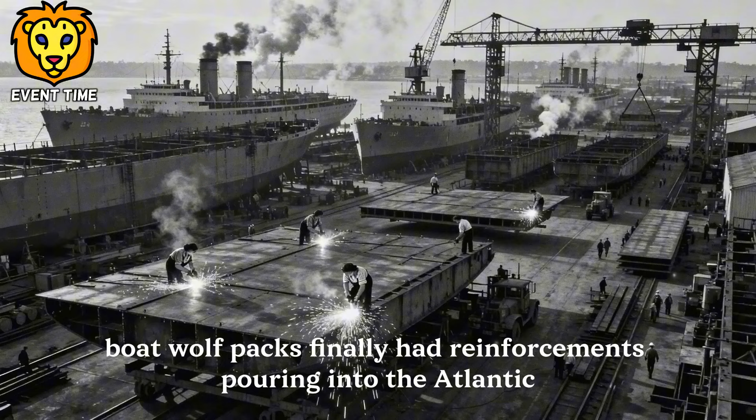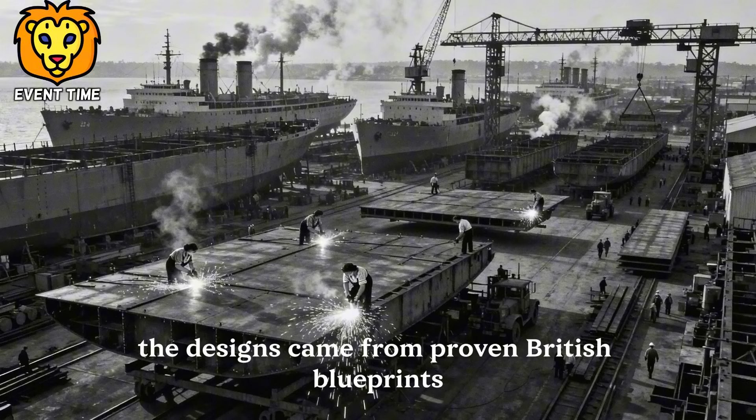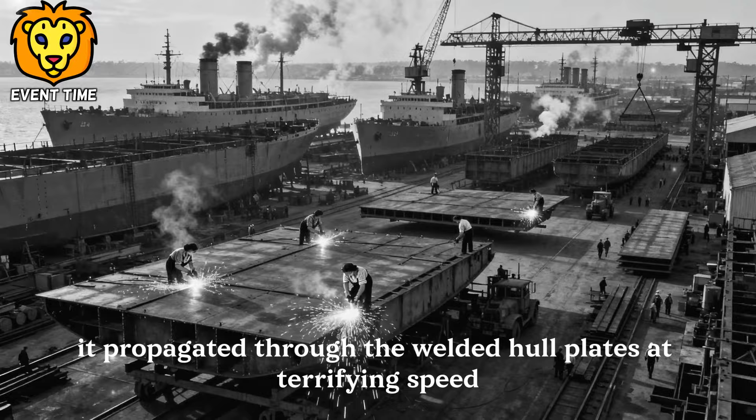The Allied shipping tonnage, devastated by U-boat wolf packs, finally had reinforcements pouring into the Atlantic. Then the ships started breaking, not from torpedo damage or rough seas, but spontaneously, catastrophically, in conditions that should have been routine. Naval architects were baffled. The welds looked solid. The steel met specifications. The designs came from proven British blueprints. Yet Liberty ships were fracturing like porcelain teacups. The cracks typically started at sharp corners, hatch openings, gun mounts, the squared-off design of the hull. Once a crack initiated, it propagated through the welded hull plates at terrifying speed, sometimes racing the entire length of a ship in seconds.

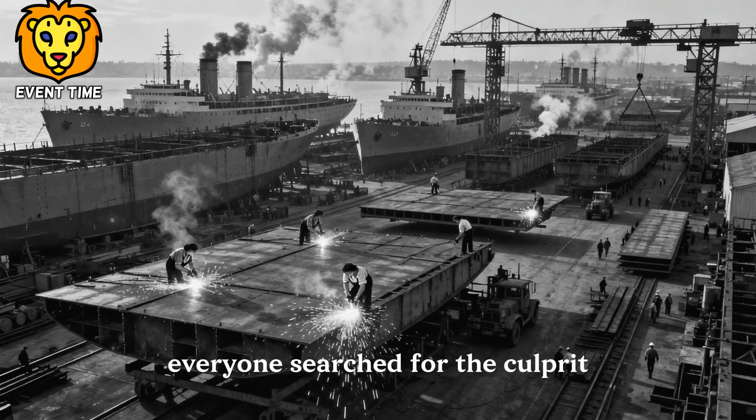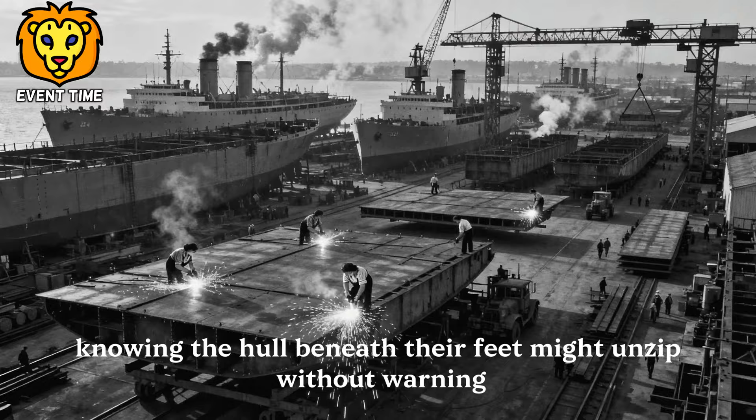The Maritime Commission convened emergency investigations. Metallurgists examined failed sections under microscopes. Engineers reviewed stress calculations. Naval inspectors crawled through hulls with measuring instruments. Everyone searched for the culprit: bad steel, faulty welds, design flaws, inadequate quality control. Ships continued splitting while committees debated. Sailors grew terrified of their own vessels, knowing the hull beneath their feet might unzip without warning in cold Atlantic waters. The miracle of mass production had become a maritime nightmare, and nobody could explain why ships built in record time were failing in record numbers.

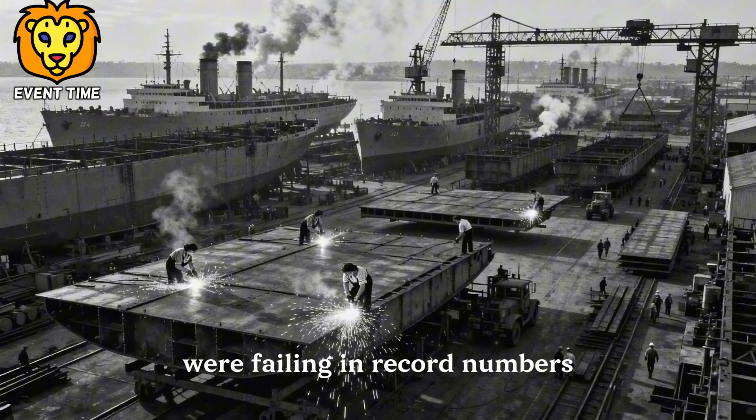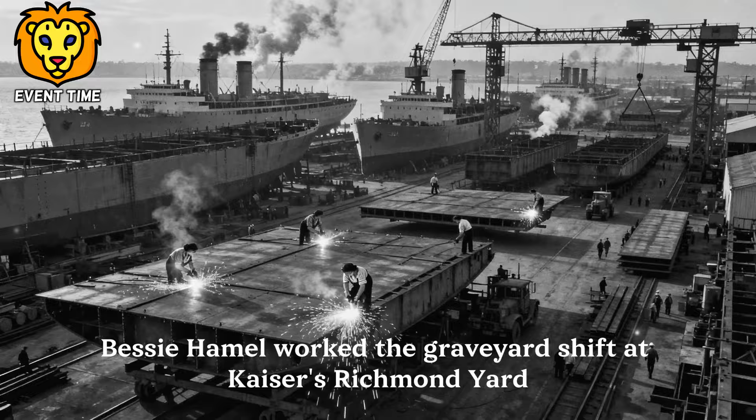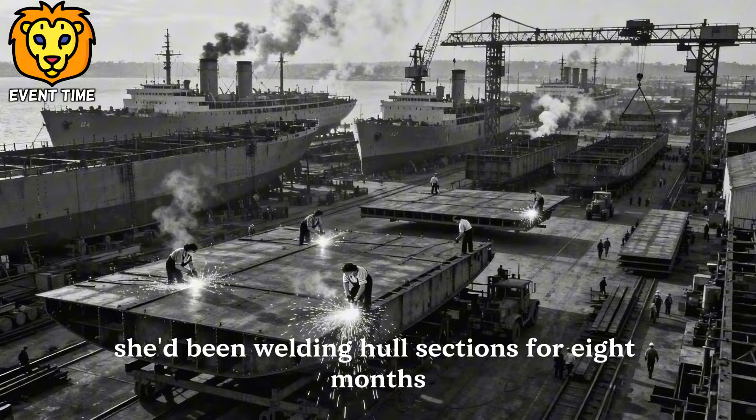The answer came from the least likely source: a welder on the assembly line who wasn't supposed to question engineering decisions. Bessie Hamel worked the graveyard shift at Kaiser's Richmond Yard No. 3, one of thousands of women who'd flooded into shipyard work after the men shipped overseas. She'd been welding hull sections for 8 months, long enough to notice something the engineers apparently hadn't.

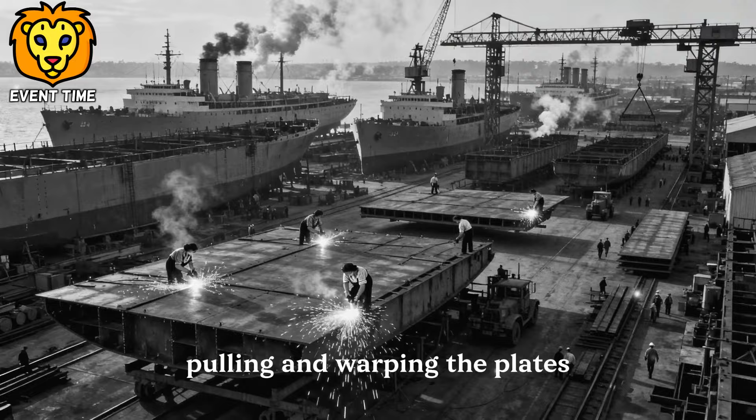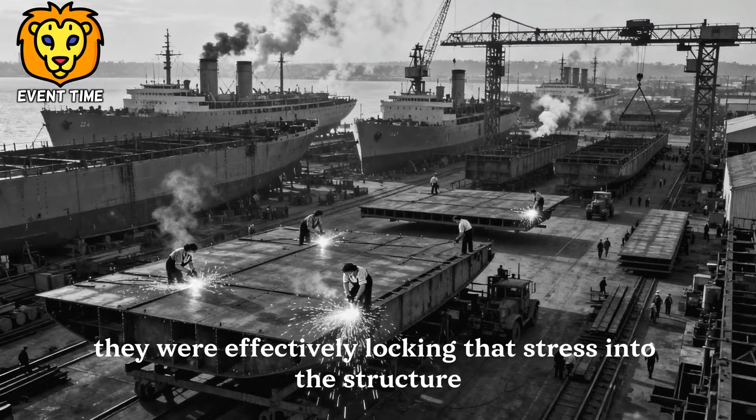Every night, she watched her team weld massive steel plates in a sequence that made no mechanical sense whatsoever. Hamel saw welders starting at the edges of plates and working inward, or beginning at one end of a long seam and running straight to the other end. As each weld cooled, the metal contracted, pulling and warping the plates. She could see the stress building, watch the steel distorting under her torch. When welders finished one section and moved to the next, they were effectively locking that stress into the structure permanently. It was like tightening the center bolts on a car wheel before securing the outer ones, a recipe for imbalance and failure.

Her foreman dismissed her concerns. She was a welder, not an engineer. The sequence came from the engineering department, from men with college degrees and naval architecture training. Hamel persisted anyway.

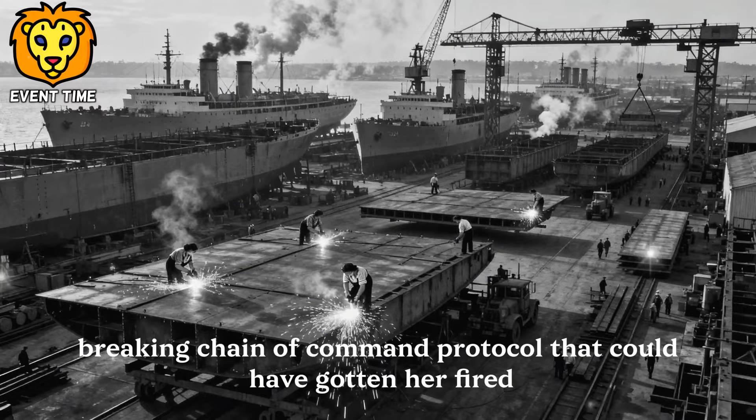In November 1943, she requested a meeting with yard supervisors, breaking chain of command protocol that could have gotten her fired. She brought samples, test plates she'd welded on her own time using different sequences. Some showed significant warping and visible stress patterns.

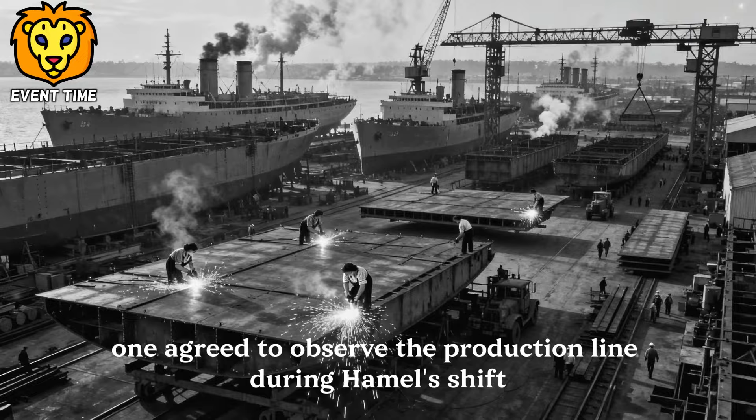Others welded from the center outward in a carefully planned sequence lay flat and true with minimal distortion. The supervisors were skeptical but intrigued. One agreed to observe the production line during Hamel's shift. What he saw confirmed her observations.

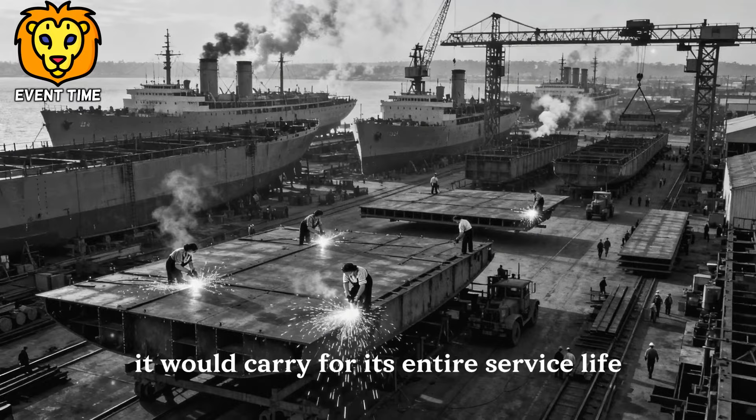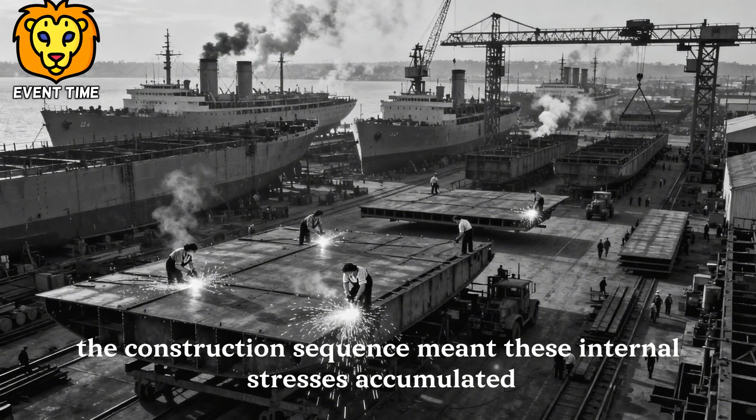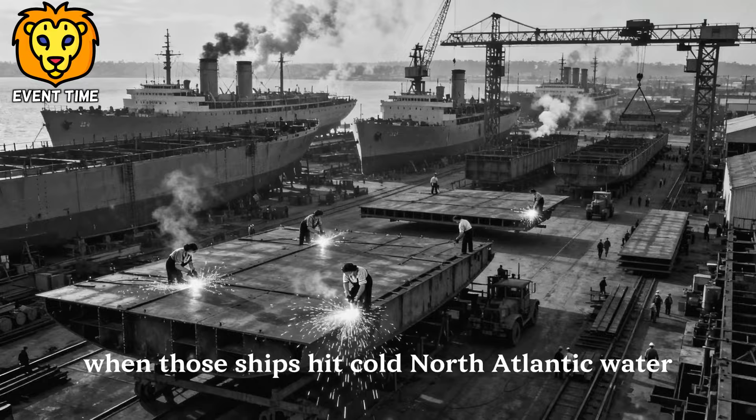Welders were essentially torturing the steel, forcing it to accept stresses it would carry for its entire service life. Every cooling weld created residual tension in the metal. The construction sequence meant these internal stresses accumulated and concentrated at specific points, particularly at the corners of hatch openings and other stress concentration points. When those ships hit cold North Atlantic water, the steel became brittle. The locked-in residual stress, combined with brittleness, created perfect conditions for catastrophic fracture.

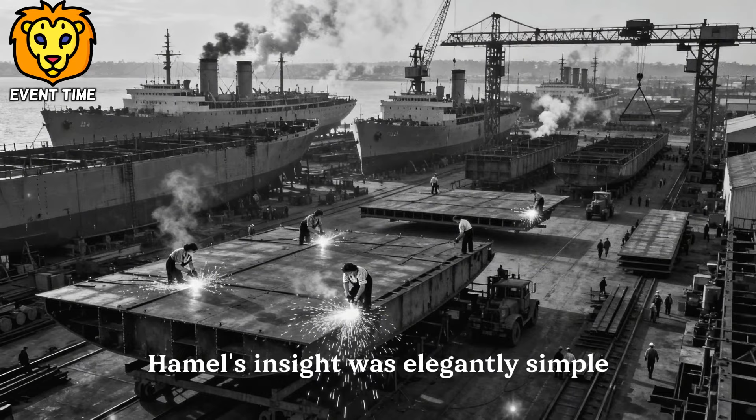Hamel's insight was elegantly simple. Weld from the center of sections outward, allowing stress to dissipate toward the edges rather than concentrate in the middle. Alternate welding locations to prevent heat buildup in any single area. Never complete welds in long, continuous runs. Instead, use a balanced sequence that distributed cooling stresses evenly.

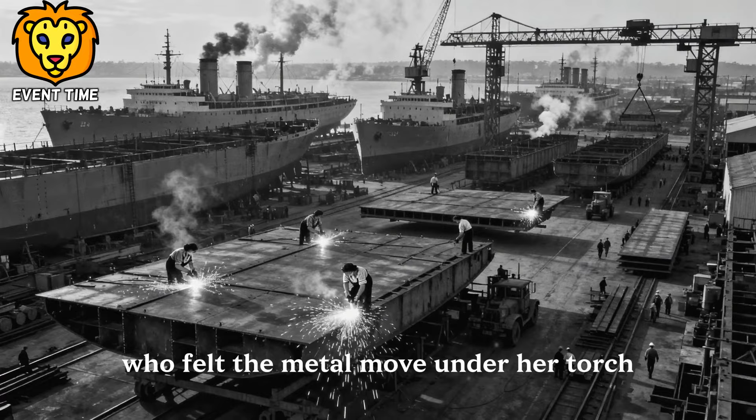These weren't revolutionary metallurgical theories. They were practical observations from someone who actually worked with the material every day, who felt the metal move under her torch and recognized the consequences.

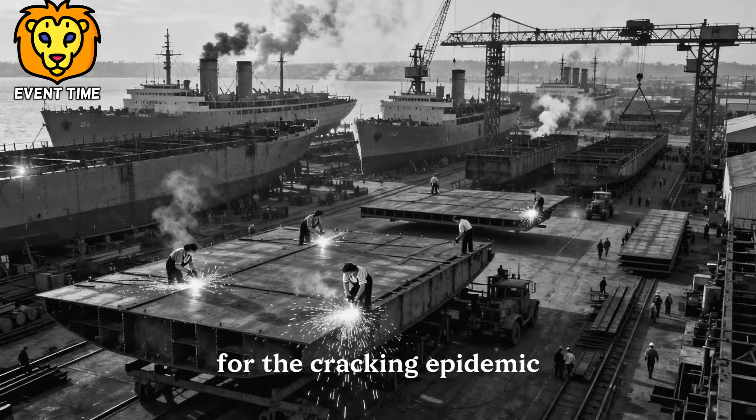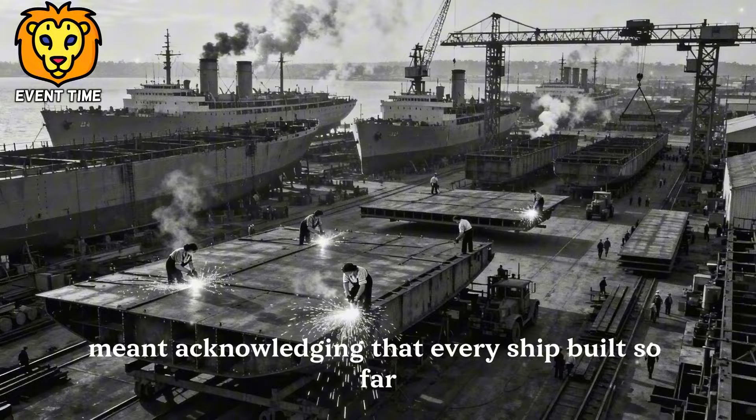By December 1943, her observations reached Henry Kaiser himself. He faced a brutal choice. The Liberty ship program was already under congressional scrutiny for the cracking epidemic. Admitting that the construction sequence, not the steel quality or weld integrity, was the fundamental problem meant acknowledging that every ship built so far had systematic flaws baked into their hulls.

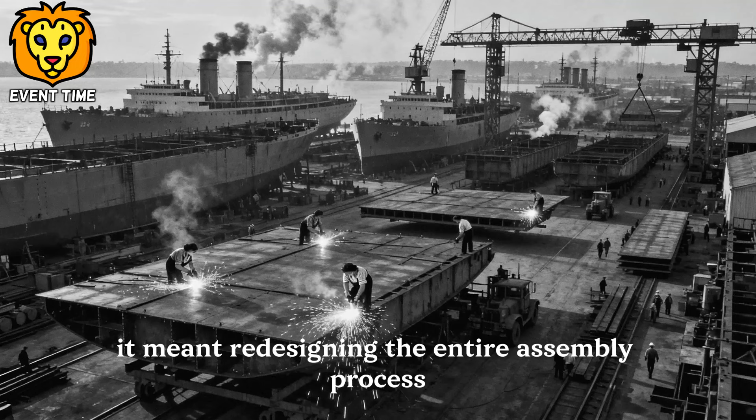It meant temporarily slowing production to retrain thousands of welders. It meant redesigning the entire assembly process. But it also meant potentially solving the fracture crisis that threatened to undermine America's entire maritime logistics chain. Kaiser, to his credit, didn't hesitate. He authorized immediate testing of Hamel's theories, pulling an entire hull section from the production line for experimental reconstruction.

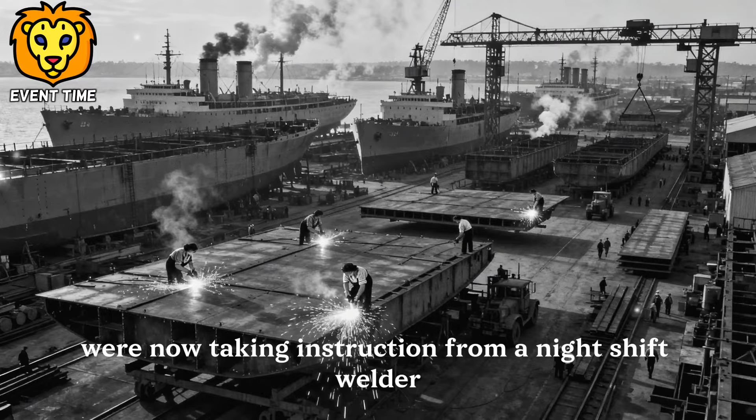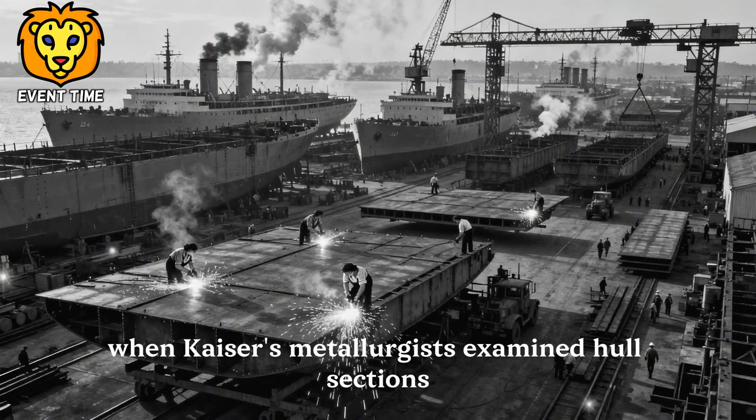The metallurgists and engineers who'd spent months analyzing failed ships were now taking instruction from a night shift welder who'd never seen the inside of a college classroom. The test results were damning and revealing in equal measure. When Kaiser's metallurgists examined hull sections constructed using conventional sequences versus Hamel's methods, the difference was measurable and dramatic.

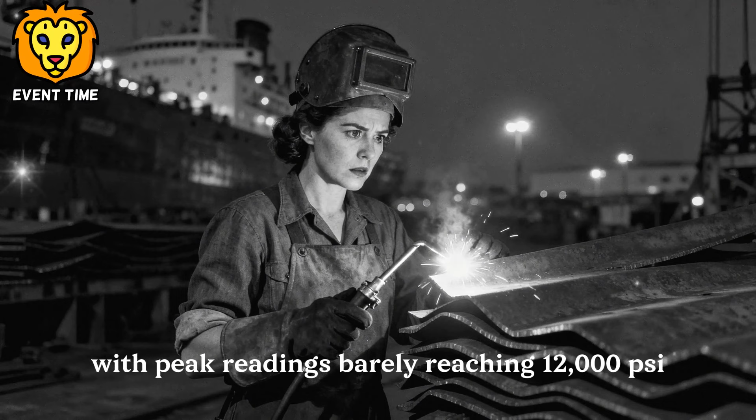Residual stress gauges showed traditional welds carried internal tensions exceeding 30,000 pounds per square inch, concentrated at key structural points. Hammel's sequence sections distributed those stresses across broader areas, with peak readings barely reaching 12,000 psi. The steel itself was identical. The welds were chemically indistinguishable. Only the order of operations had changed. Yet the structural integrity improved by factors the engineers initially refused to believe.

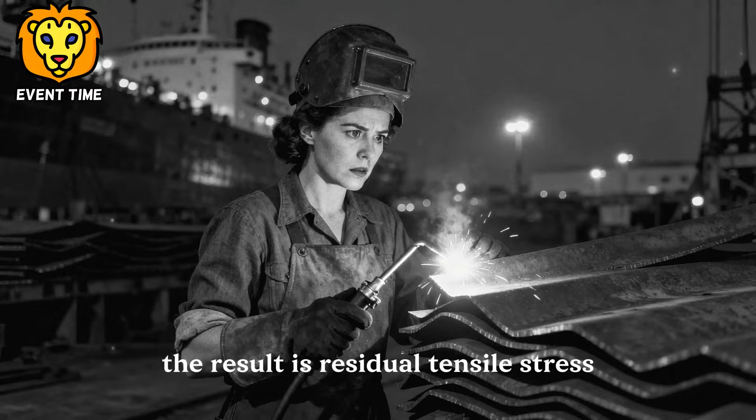The physics behind the failures finally became clear. Steel is not a static material. It's a crystalline structure that responds dynamically to temperature changes. When welders run a torch along a seam, they're creating a localized temperature exceeding 2,500 degrees Fahrenheit. The metal expands dramatically in that heat zone. As the weld cools, it contracts, but the surrounding cold steel constrains that contraction. The result is residual tensile stress locked permanently into the structure unless the welding sequence allows the stress to redistribute.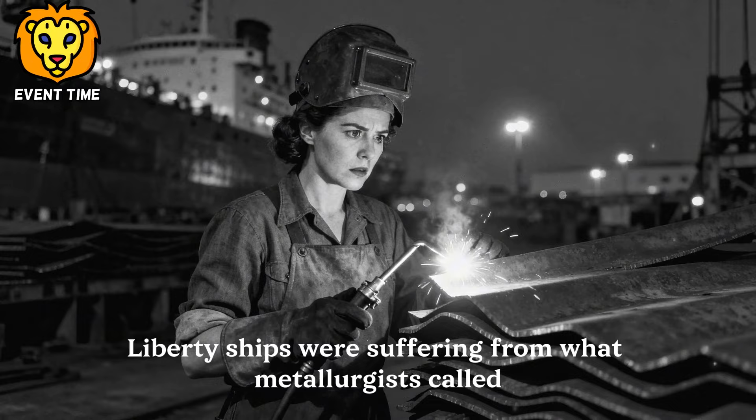Liberty ships were suffering from what metallurgists called brittle fracture propagation. The steel used in their hulls, a carbon steel designated as shipbuilding grade, performed adequately in warm water, but underwent a critical transformation in the North Atlantic's near freezing temperatures. Below roughly 40 degrees Fahrenheit, the steel's ductility collapsed. Normally, metal absorbs stress by deforming slightly, bending rather than breaking. Cold steel loses that flexibility. It becomes brittle, more like glass than the tough material welders worked with in California's mild shipyards.

When brittle steel meets concentrated residual stress at a sharp corner, say the square edge of a cargo hatch, physics takes over with brutal efficiency. A microscopic crack initiates. In ductile steel, that crack would stop, absorbed by the material's ability to yield. In brittle steel under tension, the crack becomes a sprinting fracture. The energy stored in those residual stresses provides fuel for the crack to propagate.

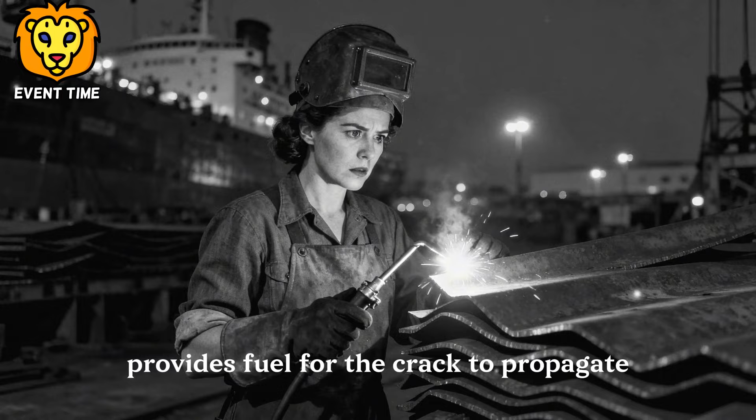Sharp corners act as stress concentrators, multiplying the local stress by factors of 3 or more. The crack accelerates, sometimes exceeding the speed of sound in steel, racing through the hull before bulkheads or frames can arrest it.

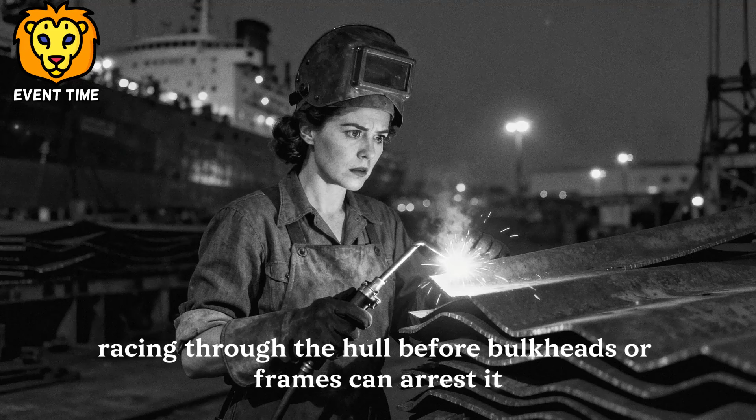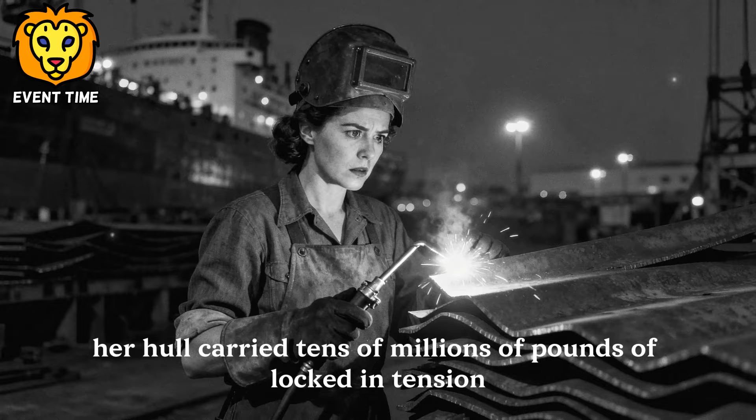The SS Schenectady's fracture made perfect sense in hindsight. She'd been built in early winter, welded in sequences that maximized residual stress. Her hull carried tens of millions of pounds of locked-in tension. When the Portland morning dropped to 28 degrees, the steel became brittle.

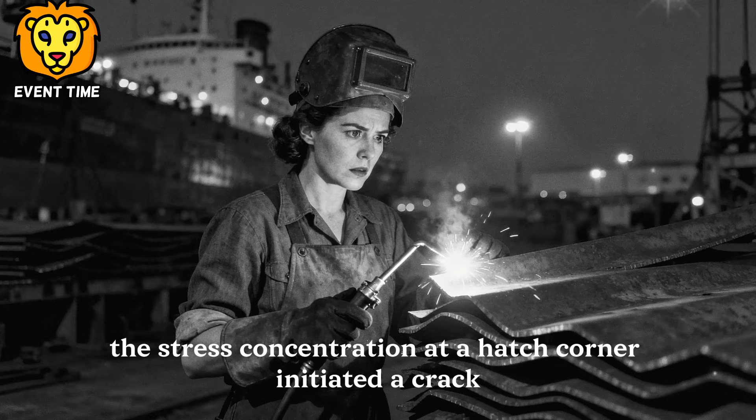The stress concentration at a hatch corner initiated a crack. That crack found a straight path through continuously welded deck plates. No riveted seams to slow it, no stress relief breaks to stop it. The fracture consumed the ship in seconds, releasing decades' worth of stored energy in one catastrophic failure.

Traditional riveted ships didn't suffer this problem, and the reason illuminated why welding seemed cursed. Riveted construction is inherently discontinuous. Each riveted plate is a separate element. Cracks that start in one plate hit a riveted seam and stop. The overlapping plates and mechanical fasteners create natural crack arresters.

Welded ships are continuous structures. A crack in one plate can run unimpeded through hundreds of feet of welded seams. The efficiency that made welded ships faster to build also made them vulnerable to failures riveted ships couldn't experience.

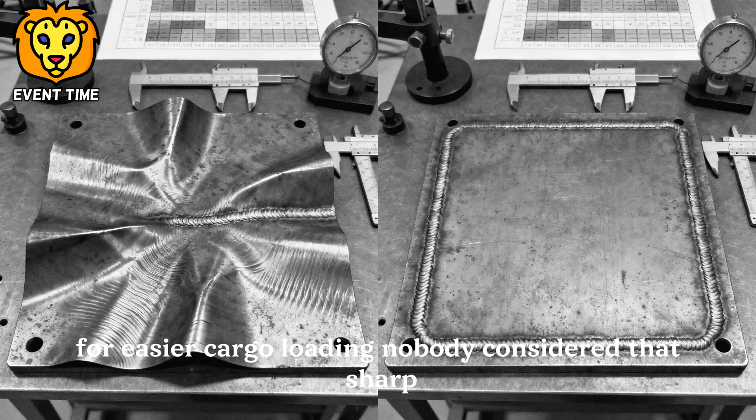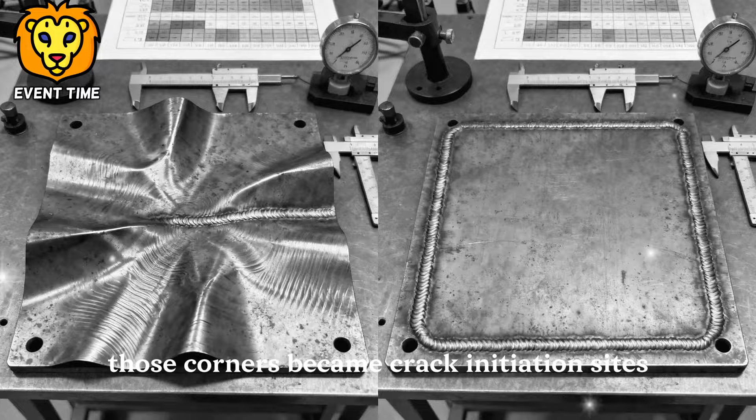The Liberty ship's squared-off design compounded the problem. British maritime architects had specified those hard corners for easier cargo loading. Nobody considered that sharp internal corners create stress concentrations that multiply applied loads by huge factors. Every wave that flexed the hull sent stress spikes through those corners. Combined with residual welding stress and brittle steel, those corners became crack initiation sites, waiting for the right conditions to fail catastrophically.

Henry Kaiser understood what the test results meant for his empire and the war effort. In January 1944, he made a decision that would either vindicate his industrial revolution or expose him as a reckless privateer who'd sent thousands of sailors to sea in defective ships.

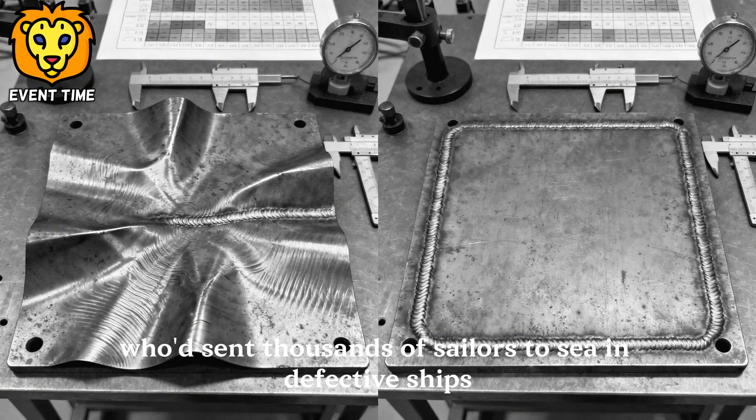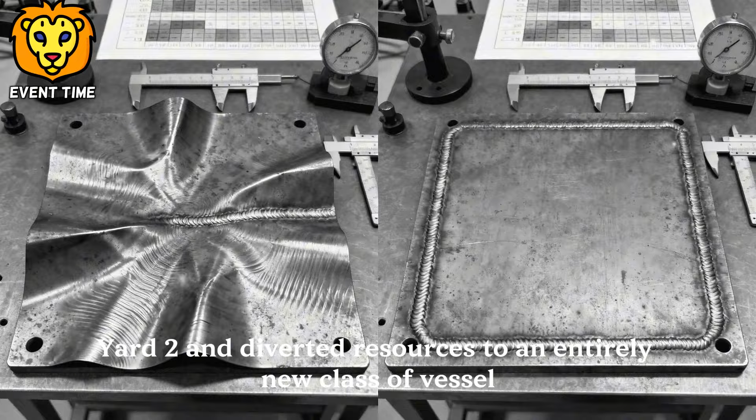He ordered a complete halt to Liberty ship production at Richmond Yard 2 and diverted resources to an entirely new class of vessel, the Victory ship. This wasn't a minor modification. It was a fundamental redesign built around Bessie Hamill's welding observations and the hard-earned lessons written in fractured hulls across two oceans. The gamble was staggering.

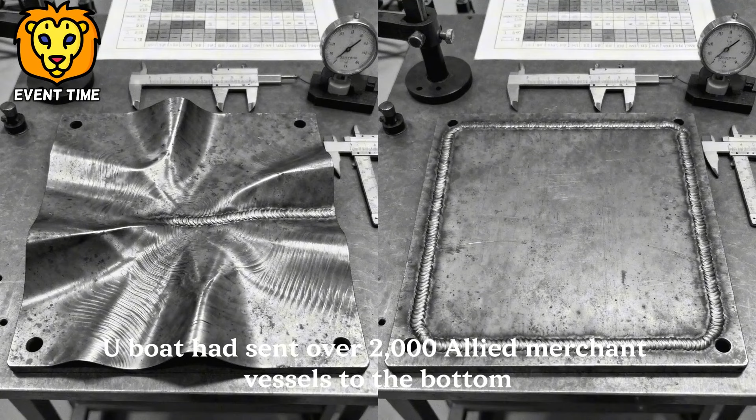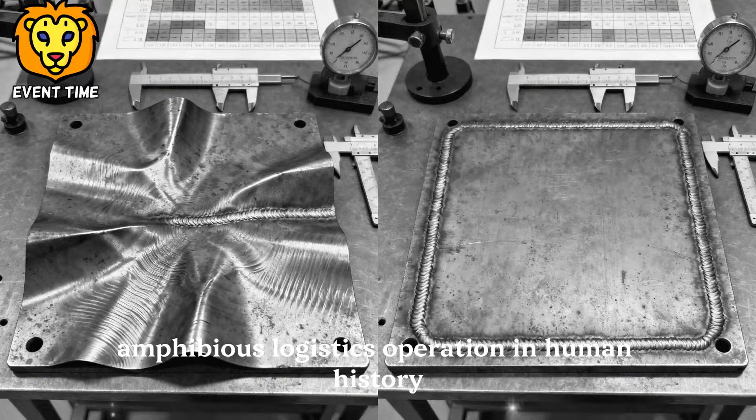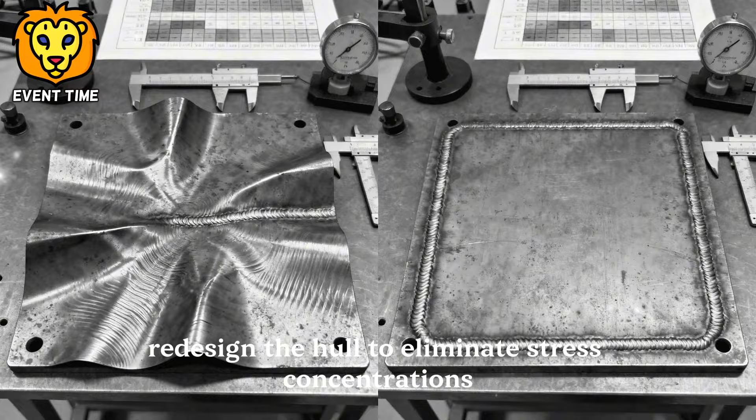Liberty ships were still desperately needed. U-boats had sent over 2,000 Allied merchant vessels to the bottom since 1939. The invasion of Europe, still months away in early 1944, would require the largest amphibious logistics operation in human history. Every ship mattered. Yet Kaiser was betting that he could implement Hamill's sequenced welding system, redesign the hull to eliminate stress concentrations, improve the steel specifications, and somehow maintain production speeds that already seemed miraculous.

His competitors thought he'd lost his mind. Congressional investigators sharpened their knives, ready to crucify him if production collapsed.

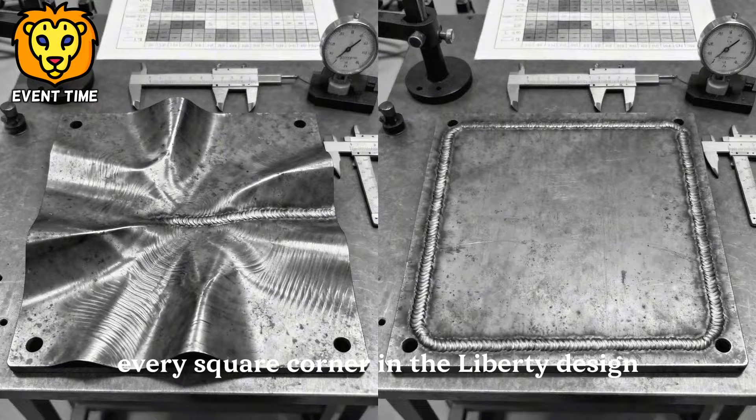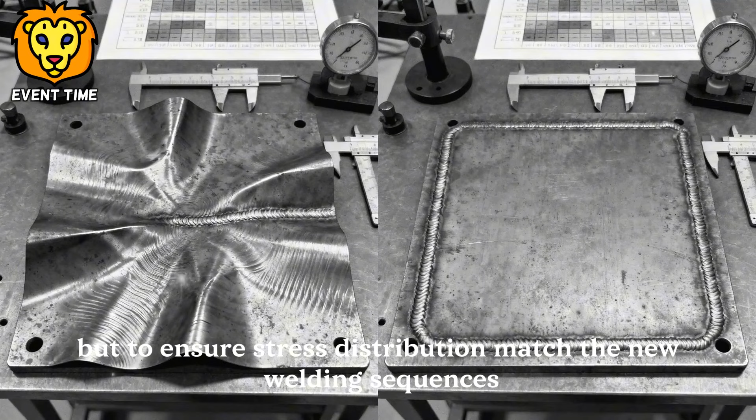Kaiser's engineers worked backward from the failure points. Every square corner in the Liberty design got replaced with rounded transitions. The hatch openings that had birthed so many cracks were redesigned with generous radii, eliminating the stress multipliers that turn normal loads into fracture initiators. The deck and hull plate thicknesses were recalculated, not to add strength, but to ensure stress distribution matched the new welding sequences. Structural frames were repositioned to align with natural stress relief points rather than fighting against the welding pattern.

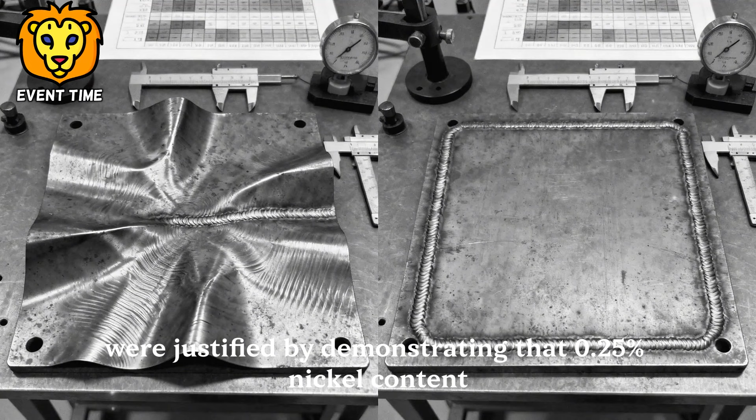The steel itself changed. Kaiser's metallurgists specified a new alloy designation with improved low-temperature toughness. The carbon content was reduced slightly and manganese content increased. Small additions of nickel, expensive and rationed for armor plate, were justified by demonstrating that 0.25% nickel content dramatically improved the steel's resistance to brittle fracture.

The Maritime Commission balked at the cost until Kaiser presented calculations showing that one prevented ship loss would pay for the upgraded steel in 50 vessels. In March 1944, the new steel specification was approved.

Then came the massive undertaking of retraining the workforce. Richmond's shipyards employed over 90,000 workers by early 1944. Thousands were welders who'd learned their trade in weeks-long crash courses, mastering just enough technique to lay straight beads at production speed. Now they needed to understand sequencing, stress relief, and thermal management.

Kaiser established welding schools within the yards, pulling experienced welders like Hamill off the line to teach. Every welder received a numbered sequence card for each hull section. Weld number one here, number two there, never deviating from the prescribed order.

The prefabrication system expanded dramatically. Rather than welding large sections on the ways where sequencing was difficult to control, Kaiser's planners broke Victory ships into smaller modules constructed in dedicated shops. A bow section might contain 50 separate prefabricated assemblies, each welded in controlled conditions using optimal sequences, then stress-relieved in heating ovens before final assembly.

This modular approach meant welders could work from the center of each small section outward, exactly as Hamill had demonstrated, without the constraints of assembling a full hull.

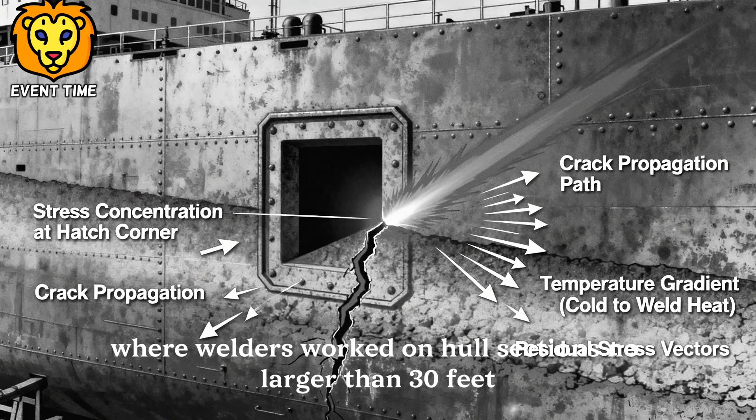The process began in the prefabrication sheds, massive covered structures where welders worked on hull sections no larger than 30 feet in any dimension. Each section had a specific sequence card. A bottom plate assembly might require 47 individual welds, numbered and color-coded.

Welders started at position 1, always the geometric center of the section, and worked outward in a spiral or radial pattern. Supervisors walked the floor with checklists, ensuring nobody skipped ahead.

After every 10 welds, the section went into a stress relief oven, heated to 1,100 degrees, and slowly cooled. This annealing process allowed the steel's crystalline structure to relax, dissipating residual stresses before they accumulated to dangerous levels.

The steel itself arrived pre-cut and pre-formed from rolling mills that had retooled specifically for Victory ship production. Unlike Liberty ships, where yard workers cut and shaped plates on site, Victory ship components arrived ready for immediate assembly.

Curved bow sections came pre-formed to exact specifications. Deck plates had pre-drilled bolt holes for temporary alignment. Frame sections were pre-welded assemblies. This preparation work, done in controlled factory environments, eliminated variables and ensured consistency across thousands of components.

Assembly on the building ways followed a radically different sequence than Liberty construction. Instead of starting at the keel and building upward, Victory ships were assembled in large modules that came together almost simultaneously.

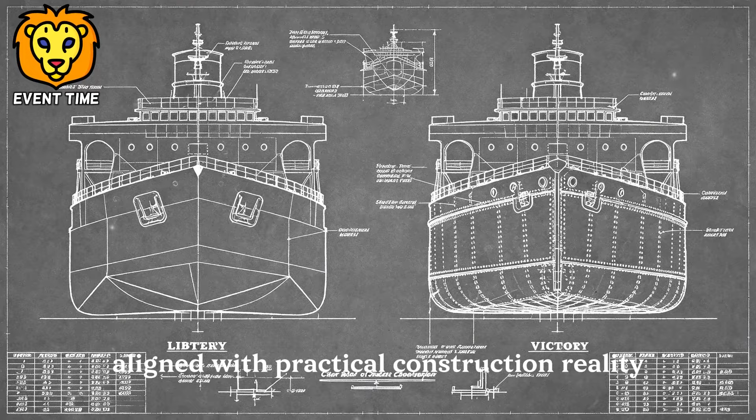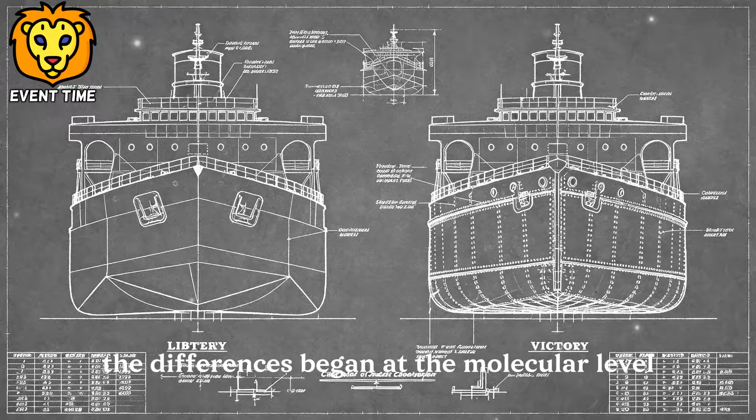It represented a complete rethinking of how complex machines could be manufactured when engineering principles aligned with practical construction reality. Bessie Hamill's observation had cascaded into a systematic transformation of industrial shipbuilding. The Victory ships that emerged from Kaiser's redesigned production system were fundamentally different vessels from their Liberty predecessors. Even though casual observers saw similar cargo haulers with identical missions, the differences began at the molecular level and extended through every aspect of design and construction. Where Liberty ships had been emergency stopgaps, Victory ships were engineered solutions that addressed every failure mode written in the

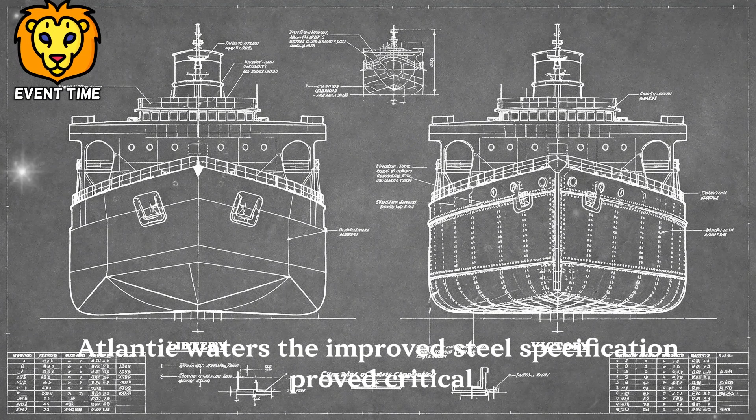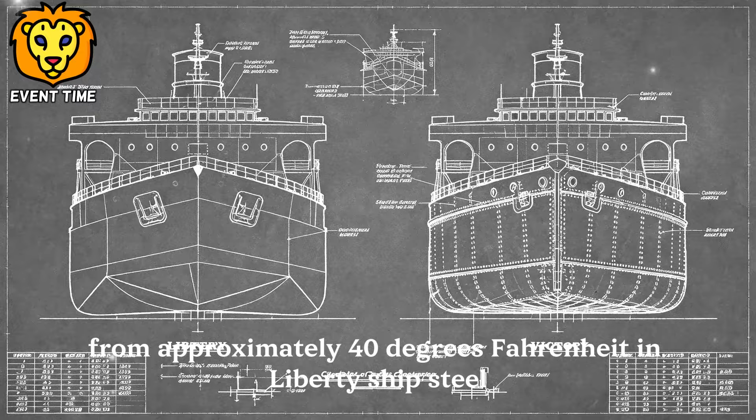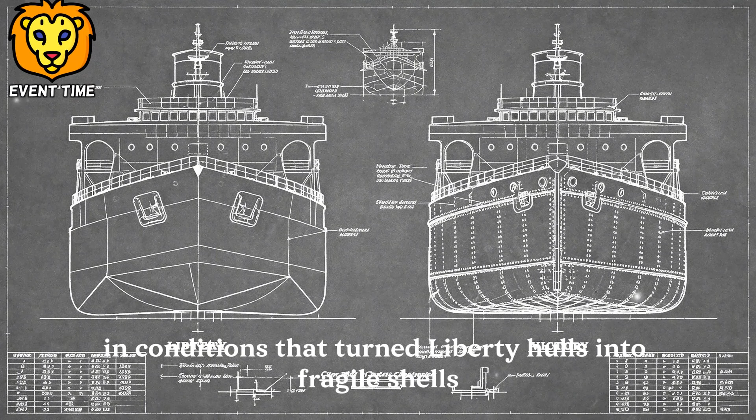blood of sailors who'd ridden fracturing hulls into cold Atlantic waters. The improved steel specification proved critical. The new alloy, designated as killed steel because aluminum was added during production to remove oxygen, demonstrated dramatically improved toughness at low temperatures. Laboratory tests showed the transition temperature, the point where steel shifts from ductile to brittle behavior, had dropped from approximately 40 degrees Fahrenheit in Liberty ship steel to near 5 degrees. This 35-degree improvement meant Victory ships retained their structural flexibility in conditions that turned Liberty hulls into fragile shells. The cost premium was 8% per ton, but the performance gain was incalculable.

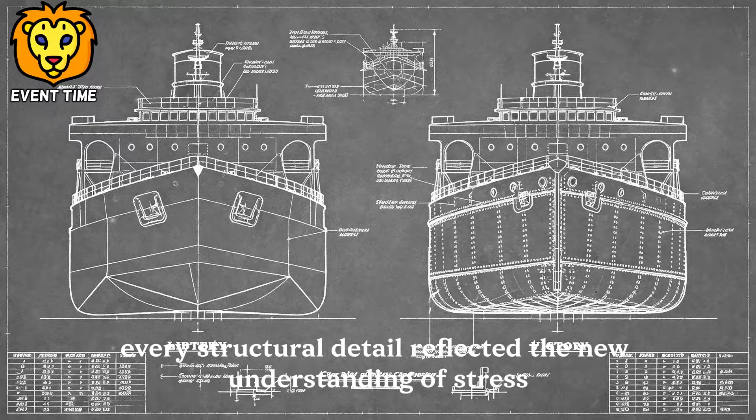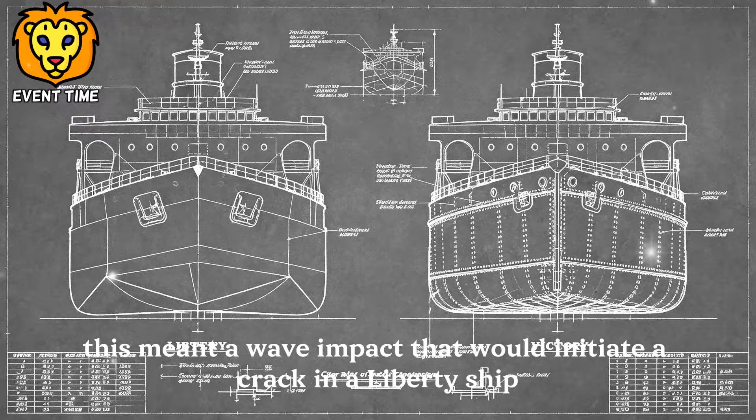Every structural detail reflected the new understanding of stress concentration and crack propagation. The rounded hatch corners, seemingly a minor aesthetic change, reduced local stress concentrations by over 60%. Engineering calculations showed that the sharp 90 degree corners in Liberty ships created stress multipliers of 3.5 to 4 times the nominal hull stress. The Victory ship's generous radius kept stress multipliers below 1.8. In practical terms, this meant a wave impact that would initiate a crack in a Liberty ship merely flexed a Victory ship's hull within normal elastic limits.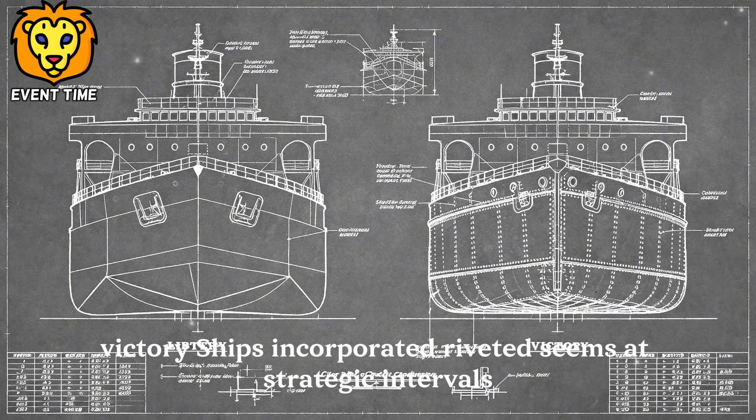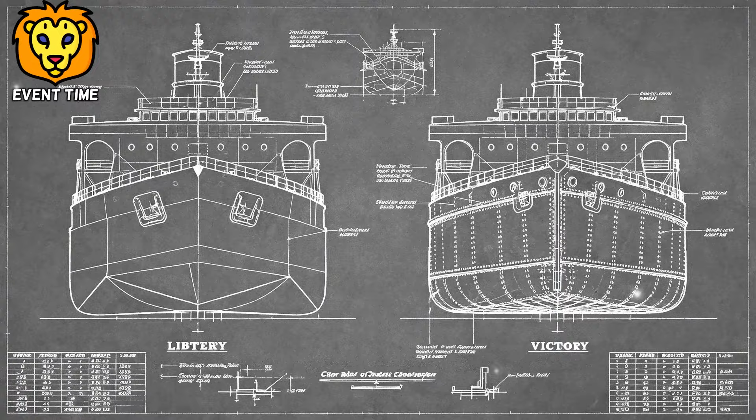The hull plates themselves were installed with crack arrestor features built into the structure. Rather than continuous welds running hundreds of feet, Victory ships incorporated riveted seams at strategic intervals. These hybrid connection points provided intentional discontinuities, places where a propagating crack would hit a mechanical joint and lose energy, potentially stopping before consuming the entire hull. The design accepted that cracks might initiate, but engineered multiple arrest mechanisms to prevent catastrophic propagation. It was defensive engineering, planning for failure modes rather than assuming perfection.

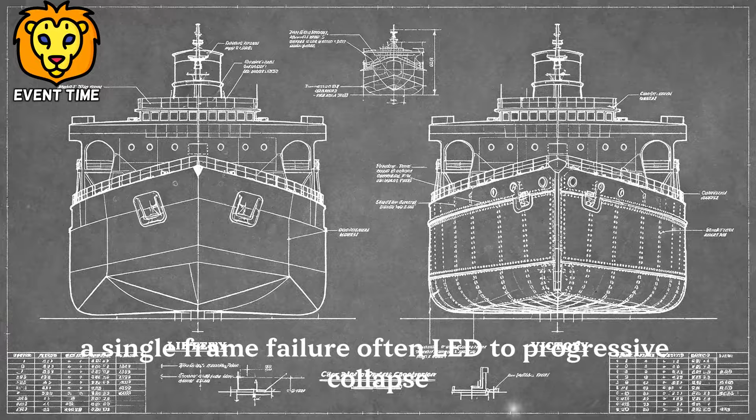Structural frames were doubled at critical stress points, creating redundant load paths. If one frame developed cracks, adjacent frames could carry the load until repairs were made in port. Liberty ships had no such redundancy. A single frame failure often led to progressive collapse as loads redistributed to already stressed adjacent structures. Victory ships could sustain damage that would sink a Liberty ship and remain operational, limping to port on compromised but functional structures.

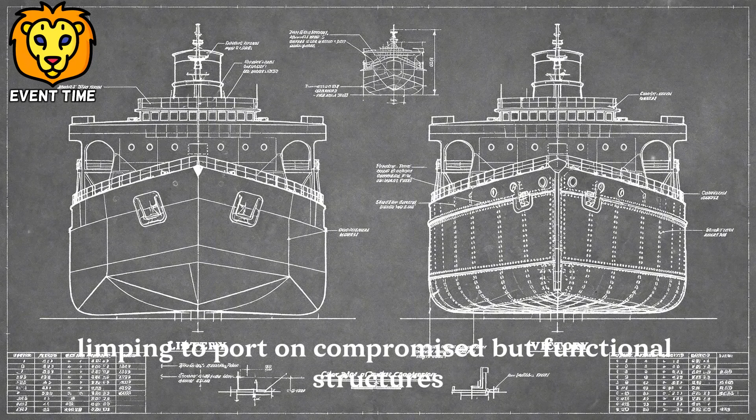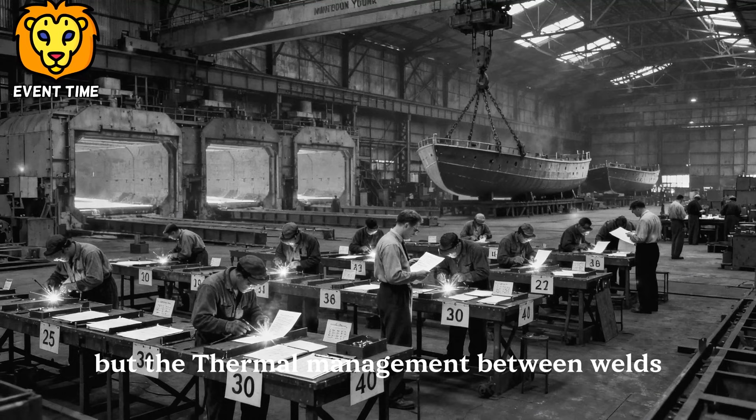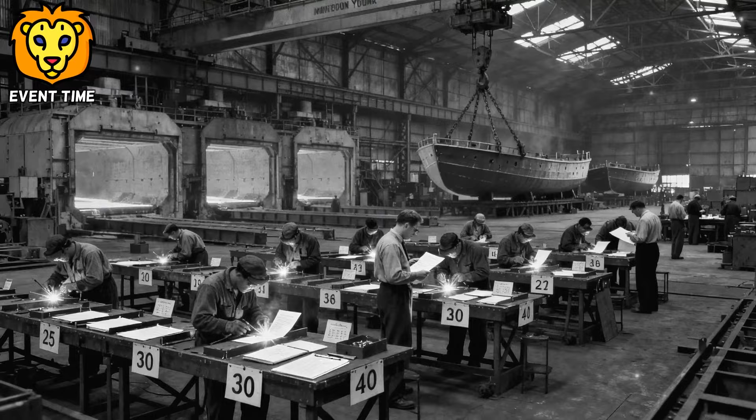The welding sequences developed from Hamill's observations were codified into detailed procedures that governed every joint in the ship. The procedure manuals ran to hundreds of pages specifying not just the sequence, but the thermal management between welds. Welders learned to monitor interpass temperature, the heat level of the base metal between successive weld passes. If the steel exceeded 400 degrees, work stopped until it cooled naturally. This prevented the cumulative heat buildup that caused massive distortion in Liberty ship construction, where welders sometimes worked continuously on long seams, superheating the steel into warped, stress-riddled configurations.

Quality control became obsessive. Every completed weld received magnetic particle inspection, a technique where iron powder and magnetic fields revealed microscopic cracks invisible to the eye. Ultrasonic testing checked internal weld quality, ensuring full penetration and no hidden voids. X-ray inspection examined critical structural welds, producing permanent photographic records of weld integrity. Ships weren't launched until inspectors certified that every weld met specifications.

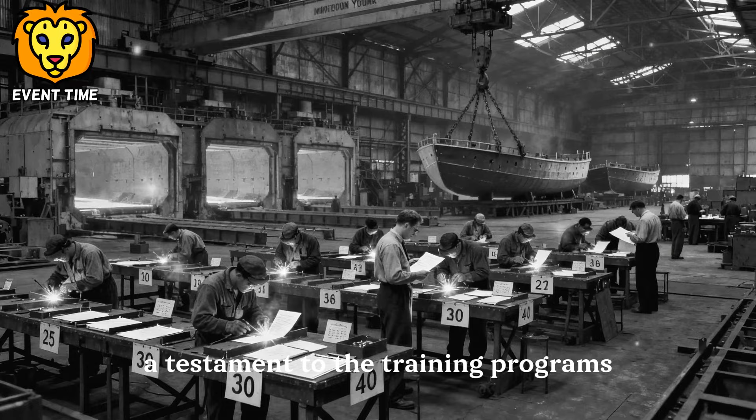The rejection rate was high initially. Nearly 15% of welds failed inspection in the first Victory ships. But welders learned quickly. By mid-1944, rejection rates had dropped below 3%, a testament to the training programs and the clarity of the new procedures.

The proof emerged in operational service. Between June 1944 and the war's end in August 1945, 531 Victory ships entered service. Not one suffered catastrophic hull failure. Minor cracks appeared in a handful of vessels, stress concentrations that inspection caught before they propagated. These cracks were repaired using the same stress relief welding procedures, and the ships returned to service. The contrast with Liberty ships was absolute and damning. The human arithmetic of Victory ships versus Liberty ships played out across two oceans in 1944 and 1945, written in lives saved and missions completed that would have ended in disaster with earlier vessels.

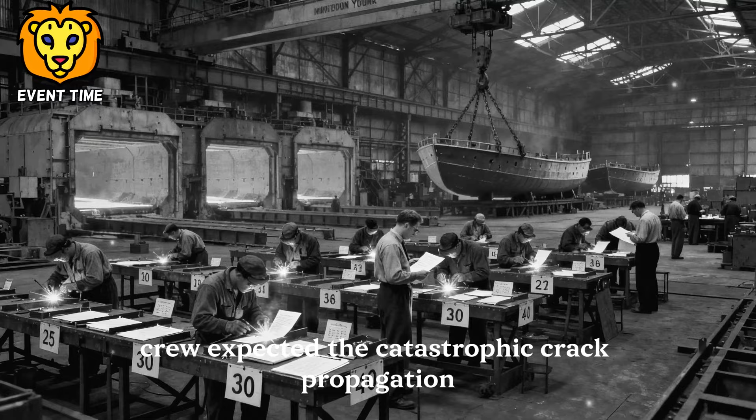The SS Juan de Fuca, a Victory ship, hit a mine off Okinawa in April 1945. The explosion tore a 20-foot gash in her hull below the waterline. Crew expected the catastrophic crack propagation that killed Liberty ships. Instead, the fracture stopped at the first riveted crack arrestor seam. She made port under her own power, was repaired in 6 days, and returned to service.

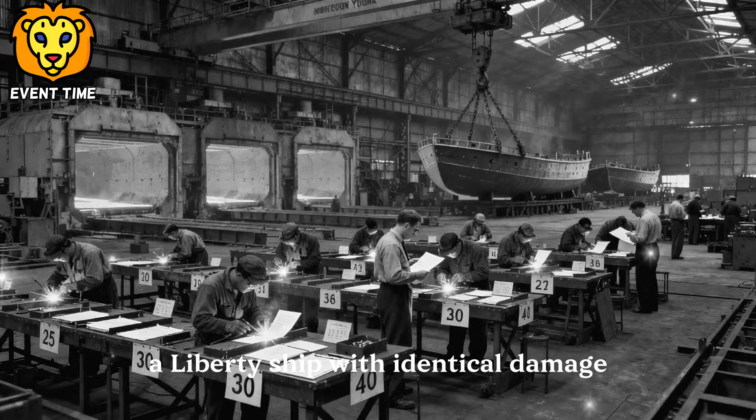A Liberty ship with identical damage, the SS Richard Hovey, suffered a comparable mine strike in February 1945, cracked longitudinally for over 90 feet, broke her keel, and sank in 14 minutes with the loss of 37 crew. The Pacific campaign's logistics would have been impossible without Victory ships' reliability.

By June 1944, American forces were pushing across the Central Pacific toward the Philippines and ultimately Japan. Each island advance required millions of tons of supplies moved across thousands of miles of ocean. Liberty ships could make the voyage, but their structural fragility meant reduced cargo loads in rough seas, slower transit speeds to minimize hull stress, and the constant risk of catastrophic failure far from any rescue.

Victory ships ran full loads at their design speed of 15 knots, 3 knots faster than Liberty ships, through typhoon-prone waters without the paralyzing fear that a cold night and rough seas would split the hull.

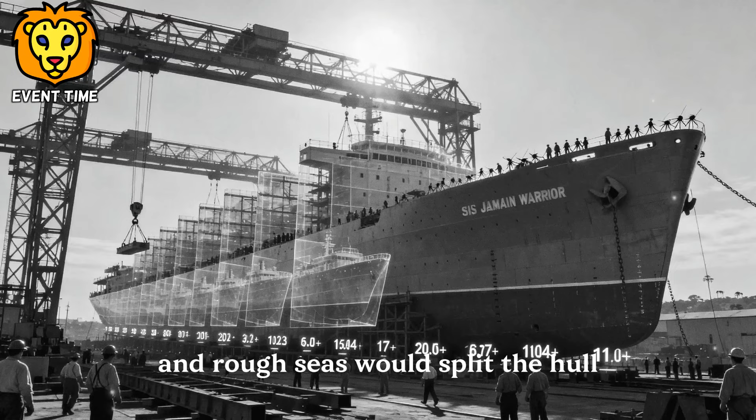The numbers told the story. Between D-Day in June 1944 and VJ Day in August 1945, Victory ships moved over 18 million tons of cargo with zero losses to structural failure.

They operated in North Atlantic convoys where water temperatures routinely dropped below 35 degrees, conditions that had fractured dozens of Liberty ships. They sailed Arctic routes to Murmansk, carrying lend-lease supplies to the Soviet Union, where seawater temperatures near freezing had made Liberty ships terrifyingly vulnerable.

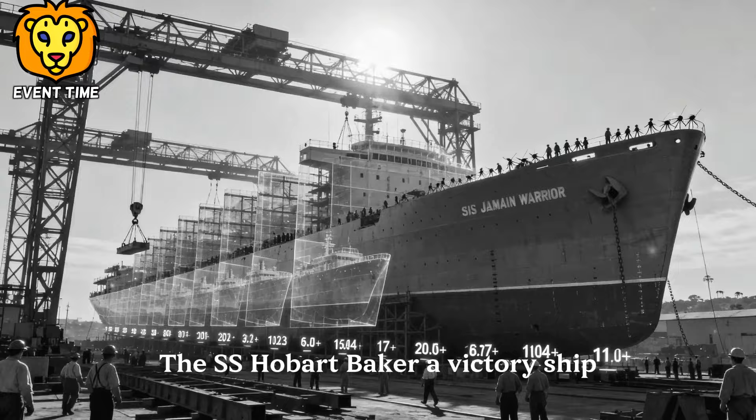The SS Hobart Baker, a Victory ship, made 17 Murmansk runs without a single stress crack. The Liberty ship John Walker, running the same route, developed cracks on her second voyage and was withdrawn from Arctic service permanently. Crew morale transformed when sailors transferred from Liberty ships to Victory vessels.

Oral histories collected after the war reveal the psychological burden of serving aboard ships known to break apart spontaneously. Merchant mariners reported constant anxiety, especially in cold weather. Sleep was difficult when every groan of the hull might signal impending fracture. Some sailors requested transfers or simply refused to ship out on certain Liberty vessels with known cracking histories.

Victory ships restored confidence. Crews pushed these vessels hard because the ships could take the punishment. That confidence translated to mission effectiveness: faster turnarounds in port, willingness to sail in marginal weather, aggressive maneuvering when under air attack.

The Battle of Leyte Gulf in October 1944 demonstrated Victory ships' combat resilience under conditions that would have devastated Liberty vessels. 16 Victory ships supported the invasion fleet, hauling ammunition, aviation fuel, and supplies through kamikaze attacks in typhoon conditions. The SS Kyle Johnson took near-miss bomb damage that buckled deck plates and cracked 3 frame sections. She continued operations, unloading cargo under fire for 4 days before withdrawing for repairs.

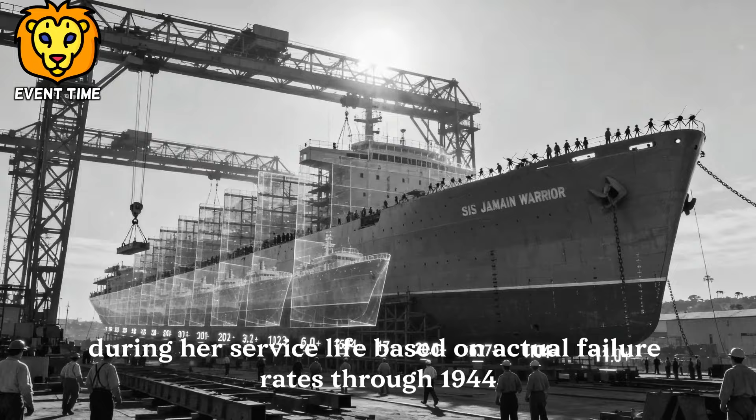The economic calculation was brutal but clear. Each Liberty ship cost approximately $2 million to build. Victory ships cost $2.6 million, 30% more expensive. But a Liberty ship had a 4.6% chance of catastrophic structural failure during her service life based on actual failure rates through 1944. Those failures killed an average of 18 crew per incident and destroyed cargo worth 3 to 5 times the ship's construction cost.

Victory ship's zero failure rate meant the additional $600,000 construction cost was recovered within the first 6 months of service simply through eliminated risk and reduced insurance premiums.

By war's end, merchant mariners had a grim saying that captured the difference: Liberty ships were built by the mile and cut off by the yard. Victory ships were built by the inch and measured by the year. Those inches, the careful attention to welding sequence, the obsessive quality control, the engineered crack arresters meant decades of service life instead of desperate prayers every time the hull groaned in cold seas.

Bessie Hamill returned to civilian life in 1946 without fanfare or recognition beyond her shipyard supervisor's commendation letter. She never received a medal, never testified before Congress, never saw her name in the technical papers that later documented the welding revolution she'd sparked.

The engineering establishment absorbed her insights, repackaged them in mathematical language and academic terminology, and published them as if the discoveries had emerged from laboratory research rather than a night shift welder's practical observation. For decades, welding textbooks taught stress relief sequencing without mentioning the woman who'd first recognized its necessity while watching hull plates warp under her torch.

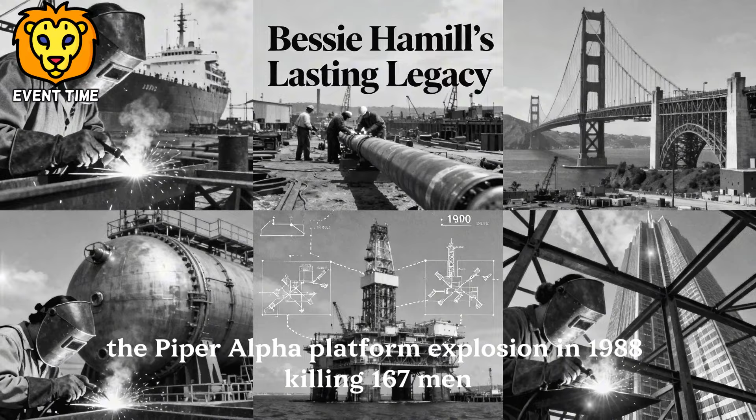improperly sequenced welds. The Piper Alpha platform explosion in 1988, killing 167 men, began with a crack in a welded pipe connection that had accumulated residual stress.

Each disaster prompted investigators to examine welding procedures, and each investigation rediscovered principles that Victory ship construction had proven 40 years earlier. Modern offshore standards now require stress relief heat treatment for all critical welds, a direct echo of the ovens Kaiser installed in Richmond's prefabrication shops.

Nuclear pressure vessels containing reactor cores under extreme temperatures and pressures represent the ultimate application of stress relief welding. The massive steel shells enclosing nuclear reactions cannot tolerate any crack initiation points.

Welding sequences for reactor vessels are planned with computational precision, simulating thermal effects and residual stresses before the first weld is struck. The entire vessel receives post-weld heat treatment in enormous ovens, exactly as Victory ship sections did, eliminating residual stresses that could become failure initiation points.

The engineers designing these procedures in the 1950s explicitly studied Victory ship construction as their foundational reference. Hamill's observation fundamentally altered how engineers think about fabrication processes.

Before Victory ships, design and construction were separate domains. Engineers designed structures, fabricators built them, and the two groups rarely communicated about how construction methods affected structural performance. Victory ships proved that fabrication sequence was as critical as material selection or structural design.